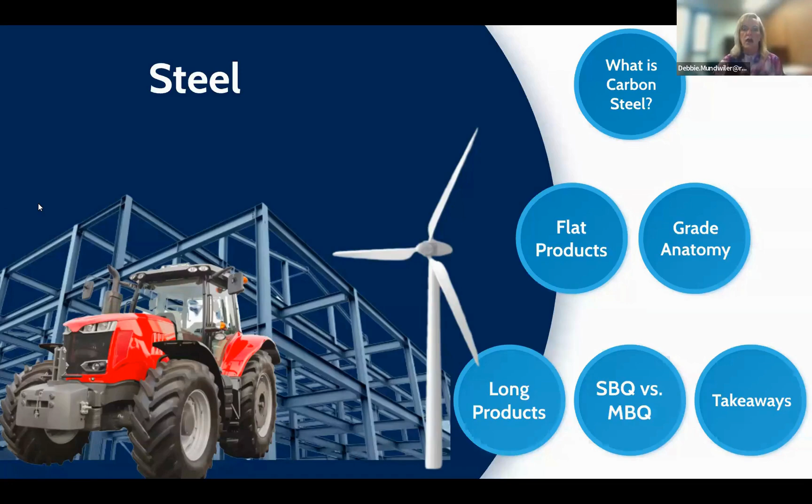Thank you, Professor Gomez. Hello, everyone. My name is Debbie Mundweiler. I am a Senior Product Manager of Carbon Long Products for Ryerson's Southern Region, and I'd like to welcome you to the Carbon portion of our Metals 101 class. Today, I will go over the topics of how steel is made and the different forms it comes in.

So let's get started. What is steel? Steel is an alloy made up of iron and other elements. Since fall is in the air and tailgating season is in full swing, I thought I could use chili as an example in relation to carbon. For chili, you'll need to start with your tomato base, and then you could add your onions, your ground beef, tomatoes, and depending on where you're from, you may or may not add beans.

Much like chili, carbon steel also has ingredients such as manganese, phosphorus, and sulfur. By adjusting those ingredients, it changes the steel properties just like when you tweak a chili recipe. It can change the flavor and texture. Is it going to be hot and spicy, or will it be mild? Will it be thin like soup broth or rich and hearty?

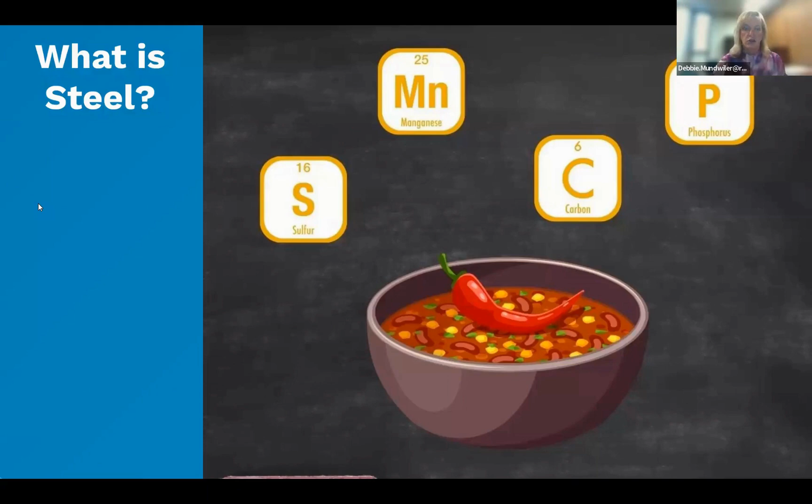Now let's discuss processed steel. The first stage of processed steel is hot rolled, often referred to as black or dry. Hot rolled black is used when the surface is not critical, but the integrity and the strength of steel is important. Another type of processed steel is pickled and oiled, also known as P&O.

During the process with P&O, the coil will go through an acid bath to remove any rust and mill scale. Once that process is complete, there is a coating of oil applied. This prevents further corrosion. P&O is much cleaner and smoother than plain hot roll steel.

Up next, you have also heard of cold rolled steel. The process of cold rolling reduces the steel to a thinner gauge. Gauge is the term we use to measure the thickness of the steel. This type of steel will have tighter tolerances, better surface finish, and uniformity.

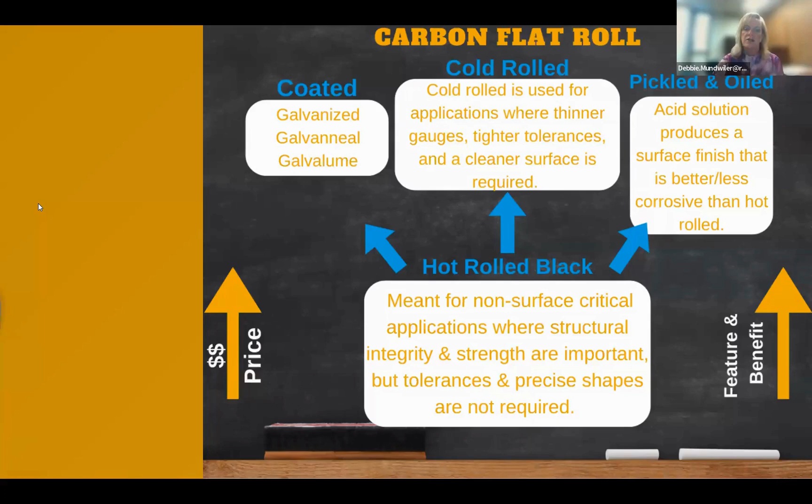Following cold rolled steel is coated steel, also known as galvanized, galvanneal, and galvalume. This process is the next revolution in surface protection and performance. The zinc coating that is applied will enhance corrosion resistance and make the steel more aesthetically pleasing. Up next is a video to show how coated steel is processed.

Hey y'all, I'm a hot roll sheet of steel. I'm going to be made into an air duct. But wait, that means I need to become more corrosion resistant. Let's face it, this mill finish simply won't cut it. So I need a bath.

What type of bath, you ask? Good question. You see, my level of corrosion resistance will depend on the type of coating I get. For instance, see the one labeled Galvalume? It contains aluminum zinc alloy. That would definitely make me more corrosion resistant, not to mention heat resistant. My cousin, who's now a roof, got one of these baths.

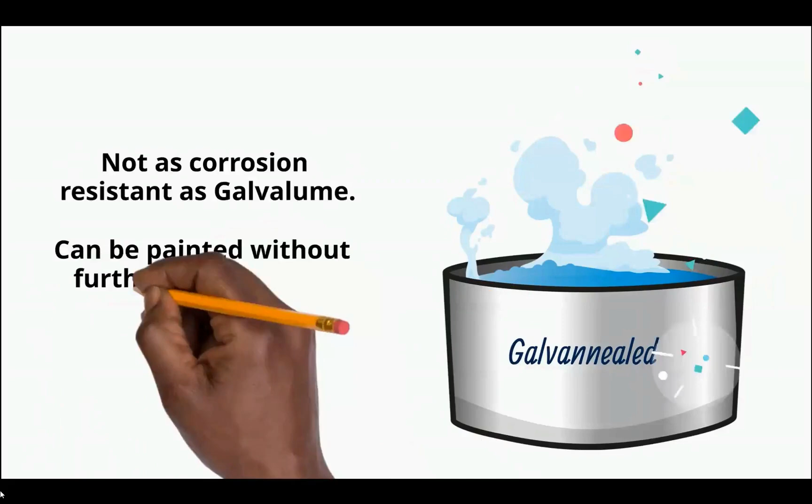Or see Galvannealed over there? That's a zinc iron alloy bath. That wouldn't make me as corrosion resistant as Galvalume. I remember my friend, who's now a door, took a Galvannealed bath. The good news is my friend can be painted without further surface preparation. But it did create a gray matte appearance. No thank you, this sheet has got to shine.

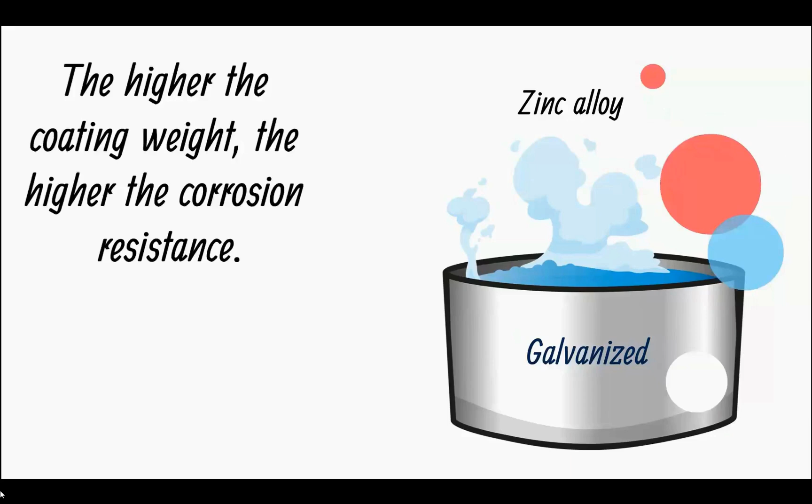Okay, well here's my bath, galvanized. It's a zinc bath. How much zinc, you ask? Well, that depends on the specified coating weight. The higher the weight, the higher corrosion resistance. Me, I'm going all in. G90. That means 0.9 ounces of zinc coating applied per square foot on both sides. And that means when I'm done, you'll be able to weld me, form me, and if you treat me right, you'll even be able to paint me. Okay, time to hop in.

The second most common is plate. Sheet and plate share similar origins, but each serves different needs. Plate is much thicker than sheet. For plate mill plate, referred to as PMP, the thickness starts at 3/16 of an inch and goes up to 6 inches, whereas coil mill plate, often referred to as CMP, begins at 3/16 of an inch and goes up to 1/2 inch and sometimes 3/4 of an inch.

CMP is made from a cast slab and rolled as a coiled product. Plate is also wider than sheet. You can get plates in 84 inch, 96 inch, 120 inch, and even sometimes greater widths.

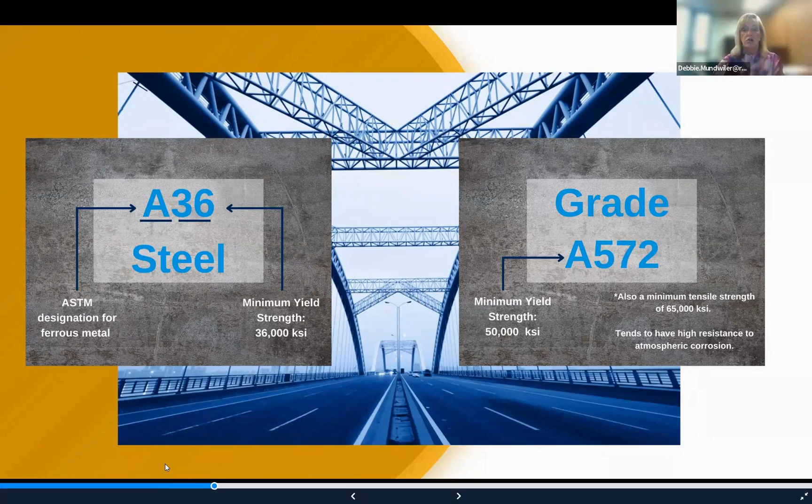Moving on, let's get into long products. When you hear about long products, you should think of bar, pipe, tube, and also angles, channels, and beams. Angles, channels, and beams are often thought of or referred to as structural products. These products are typically used in building and construction.

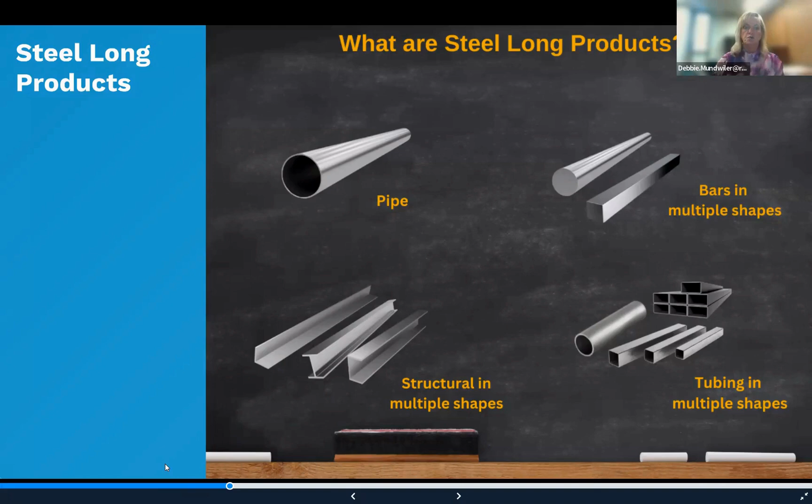Some of you may be wondering if there's any difference between pipe and tube. Yes, both are hollow, but to simplify things, tube holds things up, pipe holds things in. Examples of tubing could be grocery store ceilings and racking systems. Tubing also comes in several types and sizes, such as mechanical tubing and structural tubing. Mechanical tubing will go up to an 11-gauge thickness wall, whereas structural starts at 1/8 of an inch. Mechanical tubing is often used in recreation vehicles and solar power racks.

A common grade for mechanical tubing is grade A513, and a structural tubing grade is A500. Structural tubing is often used for signs, towers, and exercise equipment. Uses for pipe could be irrigation systems and plumbing systems. You can also get pipe in the A500 grade, often referred to as pipe-sized tubing. Another grade for pipe is A53. This grade is for pressure pipe. A53 pipe is pressure tested to see how much pressure it can withstand before bursting.

The size measurement for each is a bit different as well. Tubing is normally measured OD by ID, that's outside diameter by inside diameter, or OD by wall. The wall is the thickness of the tube. An example would be 2-inch OD by 16 gauge wall.

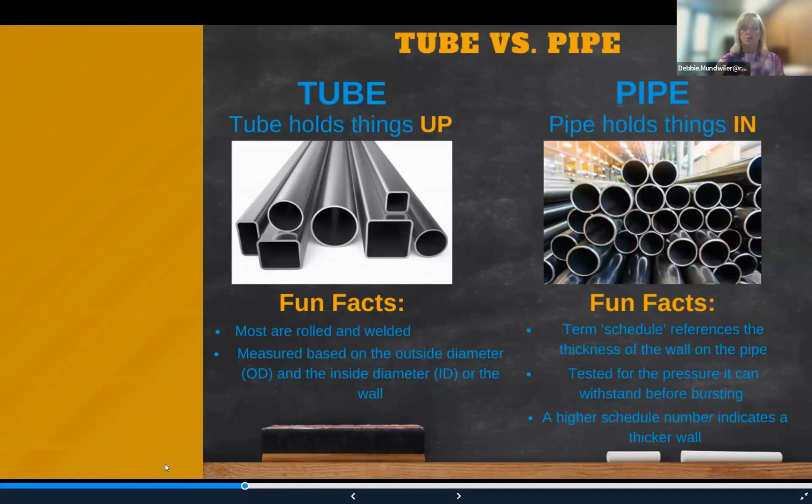Let's move on to the solid side of long products. These products consist of bars and those structural shapes I mentioned previously. There are two groups of these long products: MBQ and SBQ.

The first type is MBQ, which stands for merchant bar quality. This is going to be the equivalent of the hot roll we discussed earlier. MBQ is carbon steel only and only comes in the condition of hot rolled. There's not as much processing as with SBQ.

These hot roll bars and structural products are going to be the plain nachos of the tailgate—just a basket of chips and a little bit of cheese. Structural products are often found in buildings and bridges.

SBQ stands for special bar quality. SBQ can come in carbon and alloy. This type of bar steps things up a bit.

I would consider these the loaded nachos at the tailgate. These bars are going to have more ingredients and will be much more complex.

SBQ can also be thermally processed, often known as annealed or quench and tempered. These bars are going to have much tighter tolerances, special chemistries, and enhanced mechanical properties.

You will find these types of bars in highly specific applications, and they can also be referred to as engineered bar. SBQ requires precision and reliability that standard hot roll MBQ cannot meet. Some examples of uses would be shafts, sprockets, and gears.

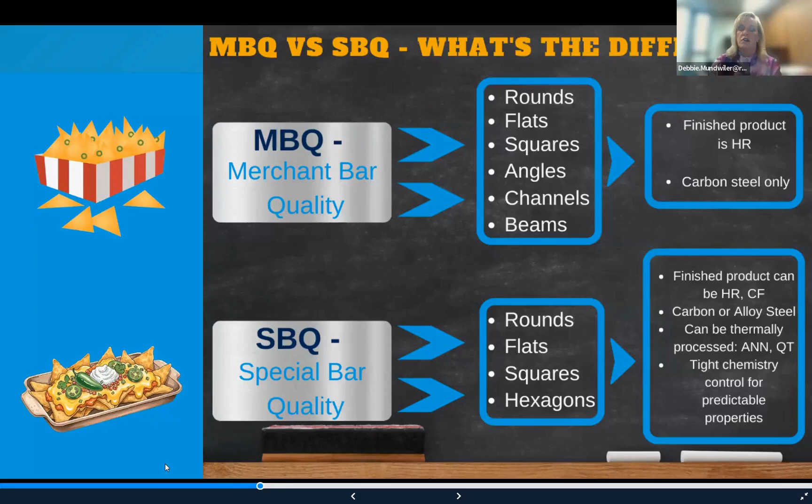So remember, when speaking of carbon steel, it comes in several forms: sheet, plate, and long products, along with several different grades of steel and conditions depending on the intended end use. Also keep in mind, tube will hold things up, and pipe will hold things in. I want to thank you for following along, and this concludes our lesson on carbon steel.

Awesome, huge thank you to Deb for kicking us off with that lesson in steel. Did anyone else get really hungry during that presentation? No, just me? All right, well, we had some questions come in while Deb was talking, so let's get into some of those. Deb, let's see.

Does the way a bar is made—hot rolled, cold finished, or turned and polished—affect its performance? Yes, all three will have differences in surface finish strength, dimensional accuracy, and the internal stress within the bar.

What materials are most common for pipe, and how does the application, like fluid transport or structural use, affect the choice? In terms of carbon pipe, if there's going to be a transport of fluids such as hot water or gas, you'd want to use a pipe that is rated by how much pressure it can handle. For structural type situations like scaffolding framework, you would not need a pressure rated pipe.

All right, that makes sense. Awesome. Well, I'm sure we're going to bring you back at the end for some more questions, but I'll let you take a breather for now.

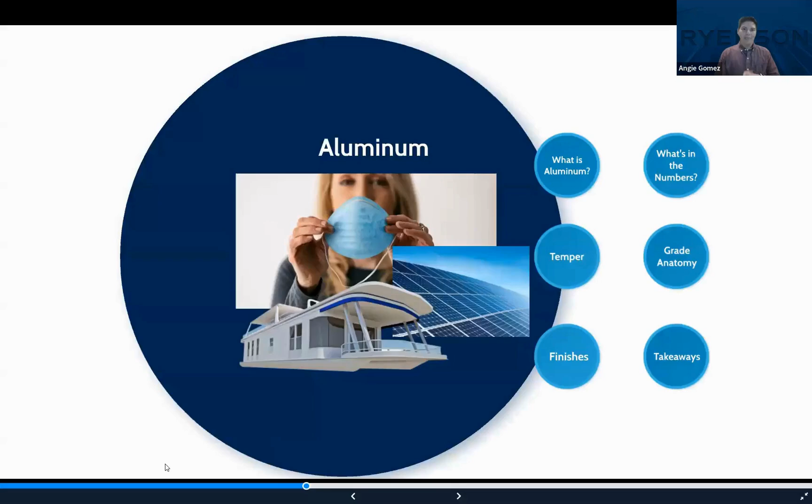So now that we built a solid foundation, it's time to lighten things up, literally. Welcome to the aluminum campus, where formability meets versatility, and we all get to meet Professor Jackson. Good afternoon, everyone. Thank you for joining us today to learn a little bit more about the metals that Ryerson offers. I'm happy to tell you about aluminum, but first a little about me.

My name's Allie Jackson. I'm your product manager for Aluminum for the South, which means I hold the relationship with the mills. I talk to your vendors, make sure you have the best price, and then we make sure your inventory is in the right place at the right time. But enough about me, let's talk about aluminum.

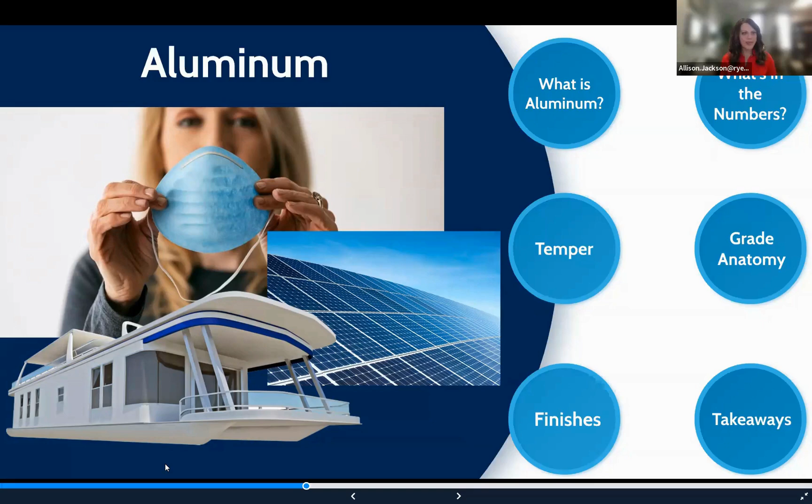You're going to learn a handful of pieces today: what aluminum is, what all these numbers and tempers mean, how we're going to put those pieces together to make grades. We'll talk about the 9 finishes that aluminum can come in, and then we'll put all those pieces back together for you with some takeaways.

When you think about aluminum, if you're not super familiar with metal, your brain may go to aluminum cans, aluminum pots and pans, but aluminum is in a lot of different places you may not expect. For example, 7% of the moon's soil is aluminum. You'll find it in all kinds of places, utilized in a lot of different applications.

Why is that? Because aluminum is made of one of the most abundant elements on Earth, bauxite. Depending on what you add to that—copper, magnesium, manganese, silicon, zinc—it's going to change your grade and ultimately the way your material acts in its end use. There's a handful of characteristics on why people like aluminum, and we'll come back to those in just a moment.

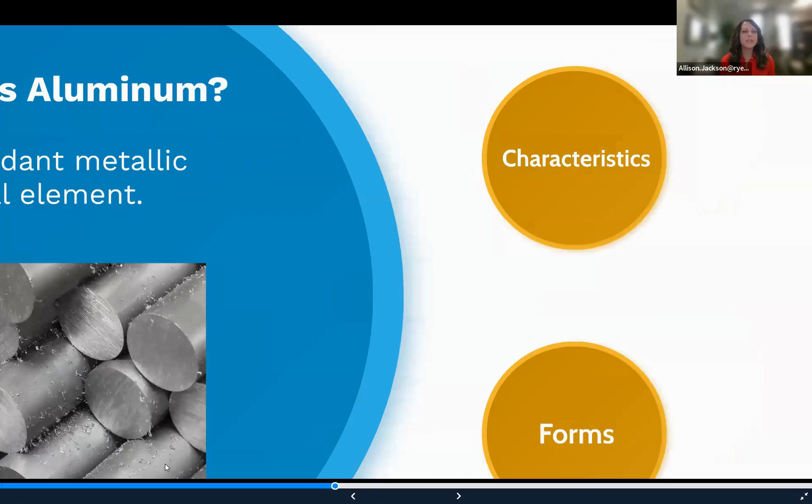There's 6 forms all together, just like Debbie. We have flat and long. But first, let's dig into the characteristics and the reasons why people like aluminum.

As mentioned, we have aluminum cans. It's probably where your brain goes if you're not super familiar with aluminum, which is good. Aluminum is very recyclable, so please recycle those cans. 70% of all aluminum that was created is still in the aluminum life cycle today. Cans in particular have a really short lifespan—from your grocery shelf to recycling center and back onto the shelf, it's about 60 days from mill production and all of those processes. So very sustainable. We like that.

Let's save the earth, please. The other piece we like aluminum for is corrosion resistance. Back on the cans, that Coca-Cola that sits in the middle of your can isn't corroding your material. Beyond that, we see aluminum utilized in other corrosion-resistant needs like marine uses—boat hulls, dock parts, things of that nature. It's also a really strong but lightweight material.

Here we have a fancy sports car, and you'll find aluminum in all kinds of different parts of cars. It's strong, so it's going to withstand a lot of force, but it's lightweight, so your car can still go fast, fast, fast.

We also like it for its formability and machinability. This car here has a few indents on the side of the vehicle, and sometimes you'll find interesting indents in a hood—that's all formed. Your aluminum is formable, it's easy to work with. Along with that, machinability—it's not going to gum up your CNC machines, it's going to chip or kind of curly Q off. And again, thinking of sustainability, you can collect that scrap, recycle it. It goes back into the aluminum life cycle, and we continue on.

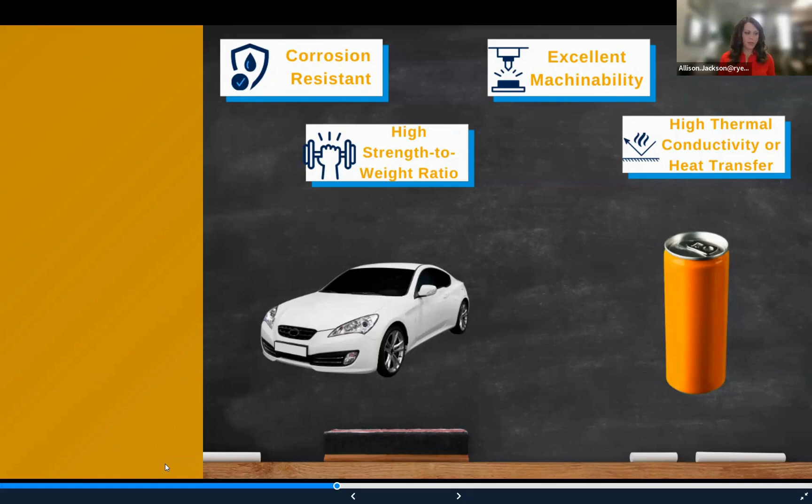So we've looked at the reasons why people like aluminum. Let's look at a few of the forms we can get aluminum in. As mentioned earlier, we have 2 flat and 4 long. Looking at our flat products, we have plate and sheet. Just like Debbie mentioned, the gauge or thickness of your material is going to really determine whether you have plate or sheet—1/4 inch is kind of the cutoff for aluminum, which can go one way or the other.

For your flat products, you're going to see that used in a myriad of places—marine, auto, house siding, roofs, aerospace, military uses, pots and pans, cans. We've talked about it all, and we'll talk about more.

The long products, we have more categories here: structural and pipe, bars which are solid pieces of aluminum, extruded shapes, and tubing. Just like Debbie mentioned, pipes hold things in and tube holds things up. Your extruded shapes here for aluminum are very unique items. If you're out there trying to sell some aluminum, you want to look out for some customs. Custom extruded shapes—you have to have a specific die for that material, and once you get a stronghold on that business, it's tough to move it around.

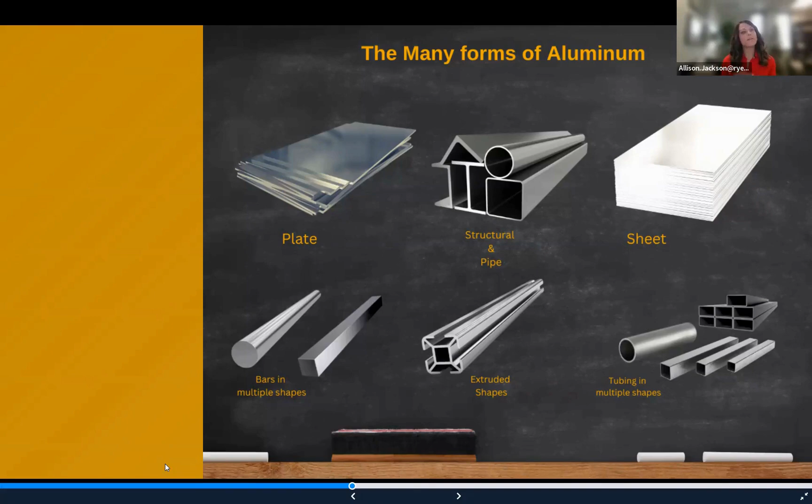We see aluminum long used in a myriad of places as well—signs, cars, HVAC, architectural, electrical uses, medical uses. Again, the utilization of aluminum runs deep, y'all. You can find it in just about anything. So we talked about why people like it and what kind of forms you can get aluminum in. Let's talk about the alloys next.

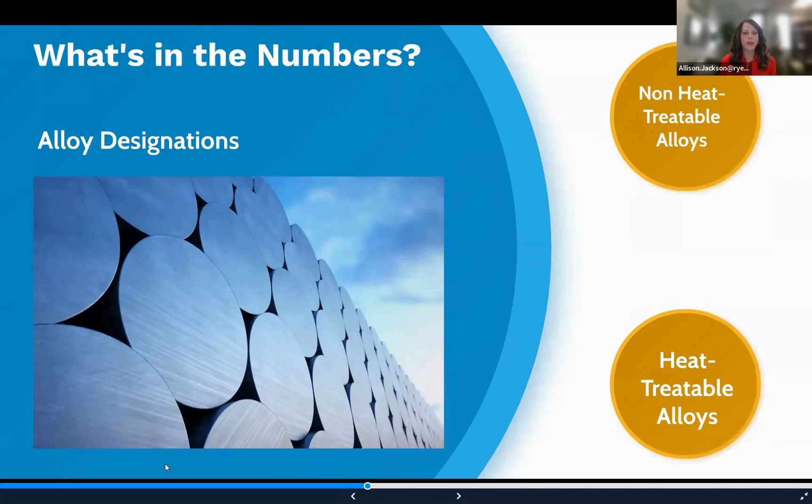So there's a couple different categories for aluminum, and the two different alloys are non-heat treat and heat treat. The difference here is the way that that material is brought to strength. For your non-heat treat alloys, you'll have a cold worked material, so rolling or bending to bring that material up to strength.

And here they are. We've got our 1,000 series, 3,000 series, and 5,000 series. As these numbers increase, so does the strength of your material. Your 1,000 series most often you'll probably find 1100 as your request. That's your most pure aluminum out there. It is very corrosion resistant and it conducts electricity and thermal heat very well.

We see the 1,000 series used in electrical uses a good bit, radiators, heat exchangers. We'll also see it in power transmissions. And again, it's good at that corrosion resistance, so you'll find it a lot in pressure vessels or chemical vessels.

Continuing down the list, we've got our 3,000 series. You'll most often find inquiries for 3003 or 3105. This is a very workable product, a little bit stronger than your 1,000 series. So you'll see it in boats, aircrafts, cargos, trailers, a lot of things that need to be formed and worked. But your 5,000 series is by far the most popular of your non-heat treat alloys here.

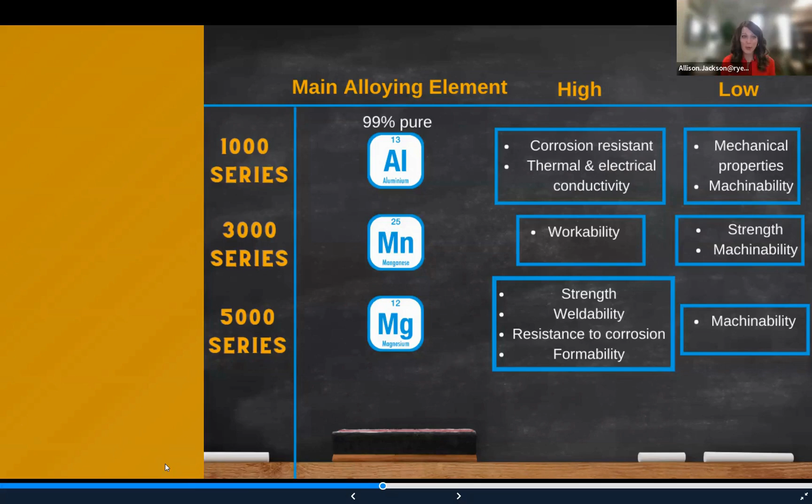5052 is for sure going to come across your desk. You'll probably see some 5005, maybe some 5182, some 5086. We'll dig deeper into what some of those numbers mean later. But your 5,000 series is your most popular because of all its great qualities. We see that used in automobiles, fuel tanks, signs, construction. Again, guys, just about anything you can think of, you can probably find some aluminum in. So those are our non-heat treat alloys.

Let's look at our heat treat alloys. As we mentioned, the difference between non-heat treat and heat treat alloys is the way that the material is brought to strength. Your non-heat treat are brought to strength through cold working. Your heat treat are heated to get to their final strength.

Same idea with the non-heat treat alloys here: as these numbers increase, so does the strength of your material. 2,000, 6,000, 7,000 series - that 7,000 is going to be by far the strongest of all the grades we've talked about so far. Your 2,000 series is probably going to be something in the 2024 family if you have any inquiries for that. It's generally a very application critical type of project.

We see it used a lot for aerospace and aviation, and I don't know about y'all, but if I am flying somewhere, I want my plane to stay up where it's supposed to be, so we want to make sure that material is correct. We also see 2000 series utilized in some precision hardware, fittings, things like that.

Your most popular series here is going to be your 6000, and you'll see 6061 and 6063 called out a good bit for those. You can find 6000 series in almost everything we've already talked about, but most often I see it in transportation and construction.

Now your 7000 series is pretty unique, guys. That's your strongest of all your heat treat alloys here. That zinc in there really brings that strength. We see that utilized in hydraulic presses, also in a lot of motorsport - ATVs, dirt bikes, things like that have to go up and then withstand a lot of force as they come back down. If you're digging around for some customers who use 7000, they're probably looking for 7075 or 7050.

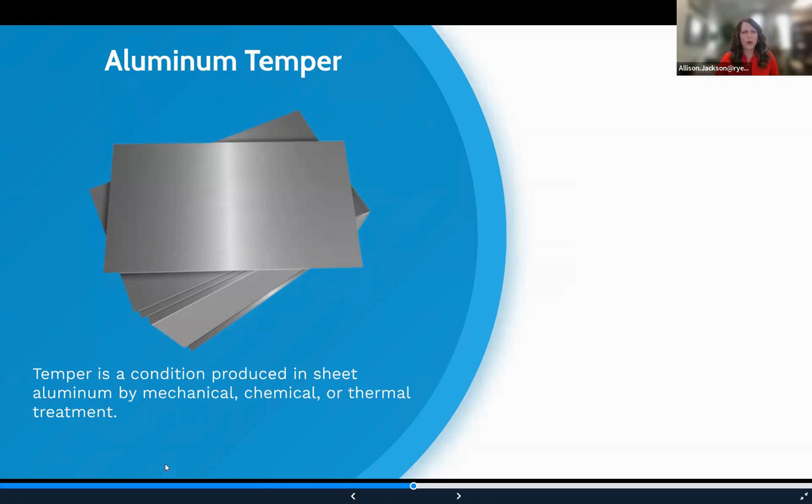So if you get an inquiry for aluminum, or you're trying to sell some aluminum, and all you have is the grade, you're missing a big piece of the puzzle. We need the temper. So just like carbon, there's letters and numbers that come along with aluminum. Your aluminum temper is going to basically be how your material performs in its end use. And we're going to watch a little video to give you some more info.

Welcome to the Aluminum Bistro, where choosing the right temper can make or break your order. I'm ordering aluminum sheets, but I don't know what temper to choose, what do you recommend? Let me walk you through our temper options. Each adds a special flavor to your aluminum, depending on how you plan to use it. For starters, we have the F temper, or as fabricated. This is your basic aluminum in its as-rolled form. No frills, no extras. Perfect if you're planning to do some extra processing on your own. Might need more refinement. Let's keep going. Next, we have O for annealed.

This temper makes your aluminum more flexible and ductile, ideal for when you need extra toughness. However, it's a little softer, so you might lose some strength. Soft and flexible, but I'm looking for something stronger.

You might like our H temper, strain hardened. This adds more hardness and strength, perfect for when you need durability. Stronger? That's more like it.

Or perhaps the T temper, thermally treated. We use heat and cooling to strengthen your aluminum to perfection, making it perfect for high-performance applications. Sounds fancy, but maybe a bit too advanced for this order.

And finally, we have W for solution heat treated. Rarely the final dish, but it's a special process used to prepare your aluminum for further treatments. I don't think I need that for now.

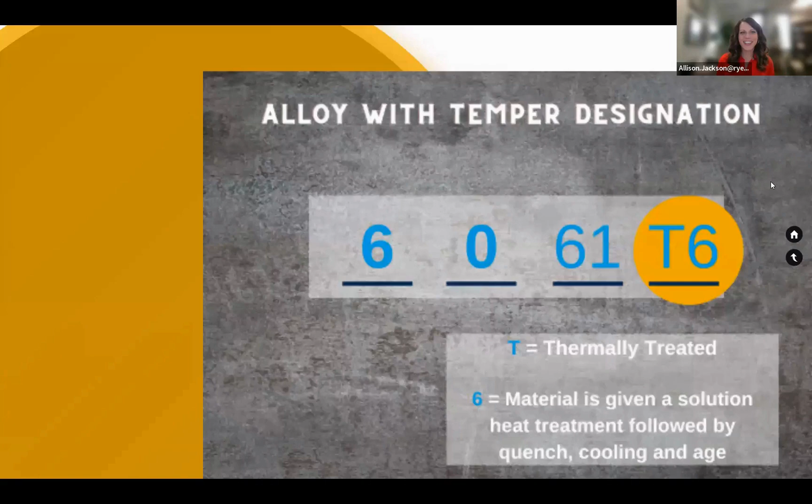So let's put it all together with some 6061 T6. As a reminder, your 6061 is your most popular heat treat alloy, and we have both pieces of the puzzle here. Your 6061 tells the mill what alloying ingredients to put in, and your T6 tells it how to finish your material, so that those two pieces working together ultimately produce a product that is going to act or perform correctly at the end of the day in its end use.

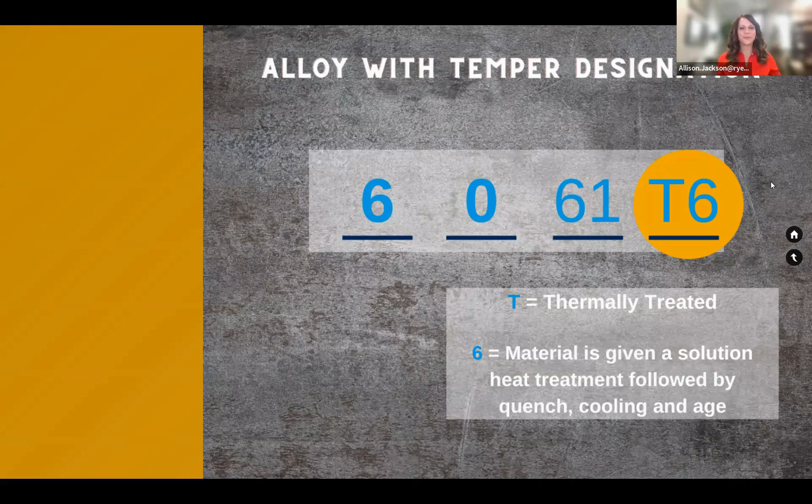Okay, so we talked about how aluminum acts, why people like it. Let's talk a little bit about how it looks. Aluminum can come in 9 different finishes.

We'll start with the mill finish because that's by far the easiest, and it's exactly what it sounds like. It's just however the mill finishes it. There's nothing fancy, no extra TLC that goes into it. That's going to be your most cost-effective of all of your aluminums.

Painted products are exactly what they sound like. You can get the top or bottom of your material painted. We have a couple of mills that paint in-house, and we also leverage some outside processors, OSPs. Both sides of that puzzle love to boast that they can match any paint color out there. They're going to ask you 9 million questions to get there, but they can absolutely do it.

Then we move on to our anodizing. Anodizing changes the chemical finish or chemical makeup of your material. Essentially, it's just a protective layer on the aluminum. I like to use the example of pet tags, dog tags. That is an anodized product. It's got that coating on it, sometimes blue or green.

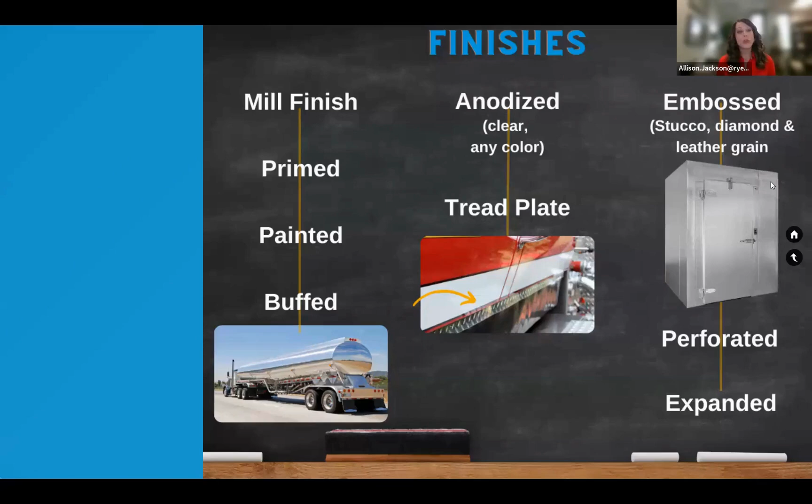So we've talked about all the chemical makeup, the forms, the finishes. Let's put all of those pieces together on our takeaways here.

Once again, aluminum is made out of bauxite, your most abundant element on Earth. You have 2 flat and 4 long products - plate, sheet, pipe, bars, tubes, and customs. There are 3 non-heat treat alloys - your 1, 3, and 5 series. And your 3 heat treat alloys - your 2, 6, and 7 series.

You have 5 aluminum temper options. Again, that's just the mechanical properties of your material and how they're going to act in the end use. And the 9 finishes that you can get aluminum in.

So we've learned a lot today. I'm going to pass it back over to...

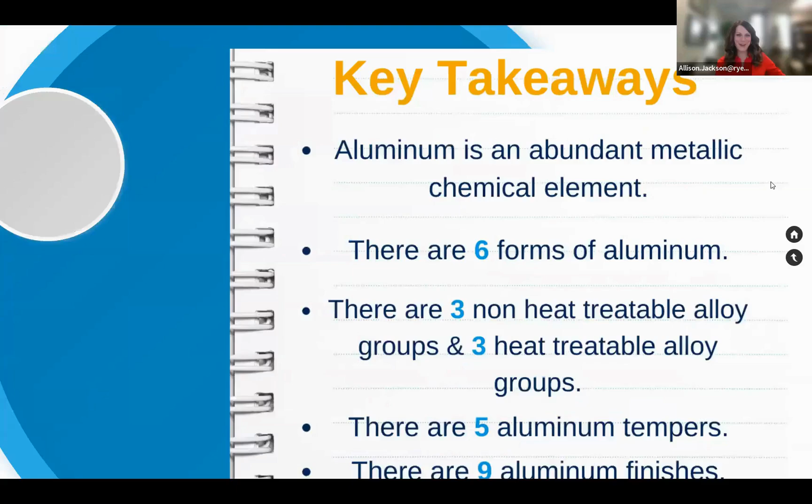Professor Gomez: That was awesome, Allie. That was truly a masterclass in aluminum. And I think you also get the award for rolling with the punches with some of those tech hiccups. So good job - we still got super valuable information there.

But while we were talking, we had some good questions come in. So let's see - the first one is, if somebody's asking for stronger aluminum, would you typically guide them towards a different grade, a different temper, or both?

Both is going to be the answer. At the end of the day, the material that you need is going to be based on the end use of your application. It's almost a tough one to answer without knowing the other pieces of the puzzle, but that's why we ask so many questions on supply chain - to make sure we're offering the right material. So as we discussed earlier, you've got your non-heat treat and heat treat products, and then different tempers. The end use is really going to drive what kind of different material we may need to order.

Got it, so the question to us would be a question back to you. That's it - what's the end use? If you give me that, I may be able to advise further. Awesome, no, that's awesome, alright.

So kind of a tie-in with that, but maybe a little more fine-tuned version: what grades are best for corrosion resistance versus grades that are better for strength?

Again, I hate to revert back to the end use, but honestly, that is almost always the answer. Typically, you're going to want to find one of your aluminum grades that has a little more manganese and iron in it. If you're really focused on corrosion resistance over strength, 5052 or 5086 is probably your better bet. 6061 is corrosion resistant and a little bit stronger, but again, depending on the temper and the ultimate chemistry of the material, the end use is really going to drive what you need to be looking at to order.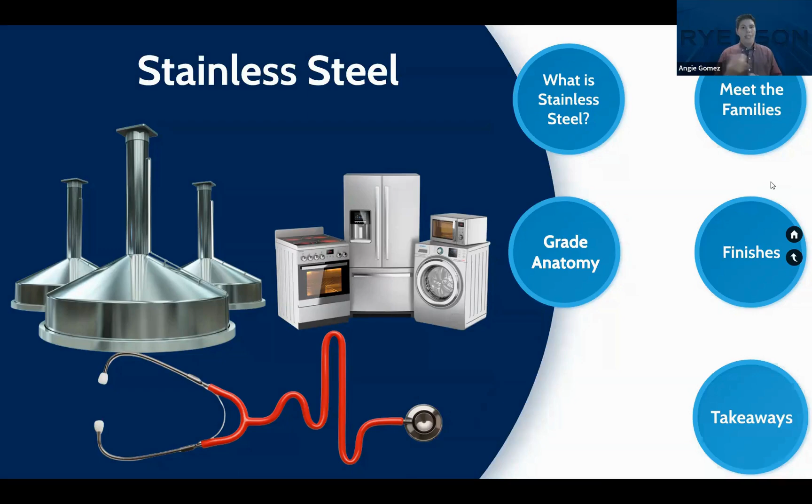Today we're actually going to dive in and explore what makes stainless steel different than the other materials. We're going to talk about its unique characteristics and the different grades, the various forms it takes, and the diverse finishes that give it its signature look. So we'll start right here.

With 5 families of stainless steels available, each is differentiated by the alloying elements that are added. There are over 150 different stainless steel grades, each with their own chemical makeup, and we actually see new alloys being developed even today. Stainless steel is a versatile iron-based alloy known for its resistance to rust, corrosion, and staining.

Due to its chromium content, it's continuously protected by a passive layer of chromium oxide that forms naturally on the surface when the metal comes in contact with air or water. This layer of chromium oxide allows the stainless to regenerate itself when scratched, thus it's corrosion resistant, highly durable, and less prone to rusting, even in moist and harsh environments.

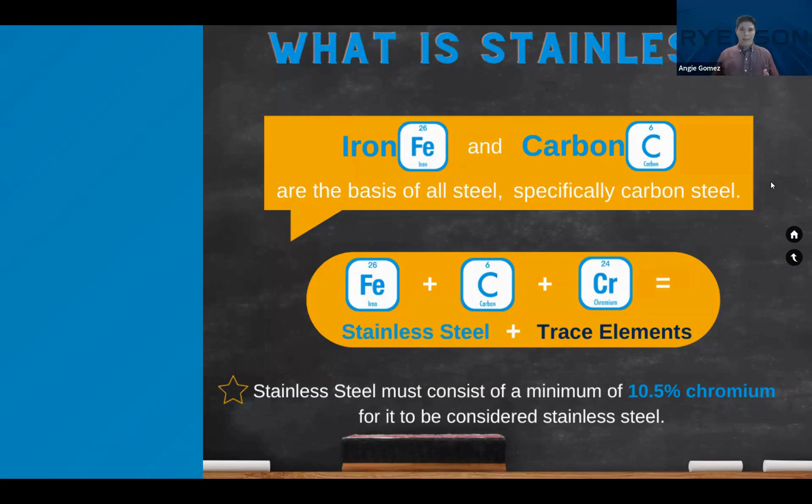Stainless steel comes in many forms and shapes, just like the other materials we discussed today, so we're going to take a look at that.

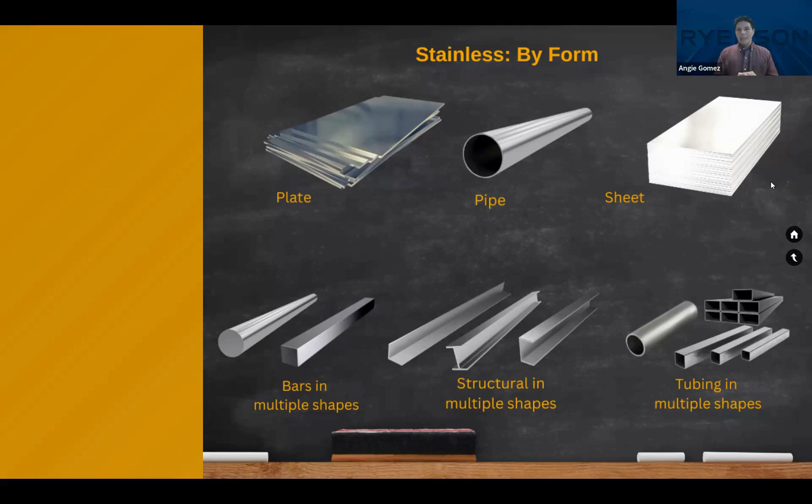So now that you have some of the basics, we're actually going to jump a little deeper into the stainless grade families.

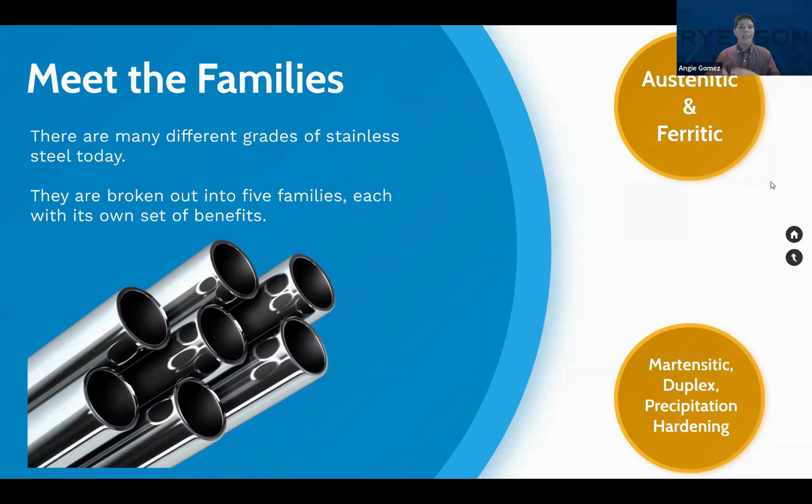Stainless steel is grouped into 5 main families. Each family has unique properties and applications, from kitchen utensils to medical equipment to industrial machinery and architectural structures. The classification of stainless steel into families is actually determined by the alloying elements that are added to that basic iron and carbon composition, and that's going to then in turn create the grain structure and give it its properties. So 2 of those grain structures are austenitic and ferritic.

If you see an L, for example 304L, on a test report or stenciled on material you receive, that means it has a low carbon content, composing less than 0.03 of its overall composition. You will see austenitic metals used in your food containers, tanks, silos, and most general purpose and cosmetic applications.

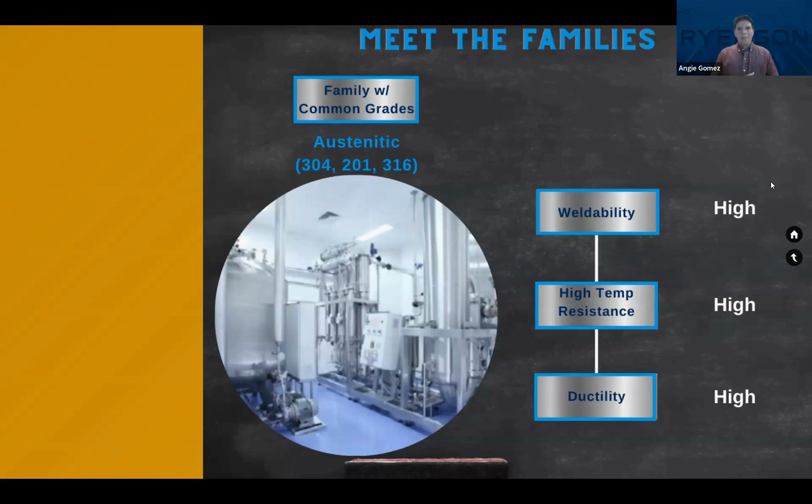So ferritic stainlesses contain more chromium than austenitic, no nickel, and adds in ferrite. The absence of nickel allows ferritic stainless to be more stable in pricing over time, and ferritics are magnetic, while austenitics are not because they contain austenite. Ferritics are typically used in appliances, car exhaust systems, and dishware.

You probably find 430 as the metal that's inside your dishwasher, and 409 is probably part of your car muffler.

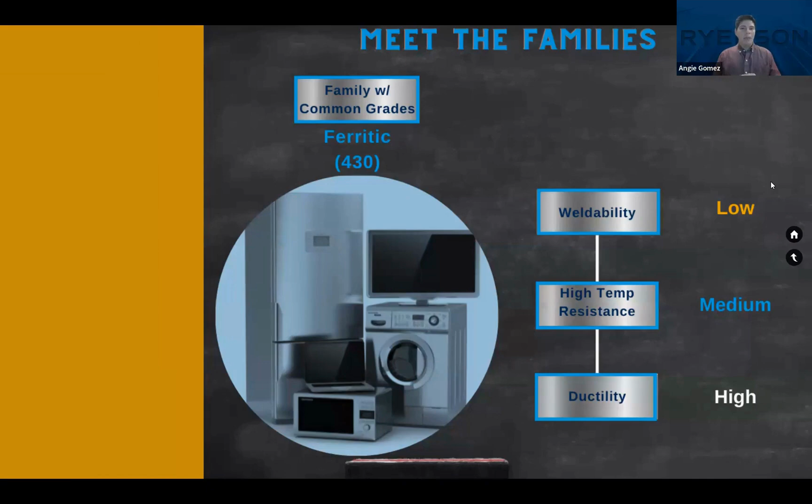Martensitics are going to be used in cutlery and tools, and they contain higher carbon than austenitics and no nickel. Duplexes are common in the oil and gas sector due to offering properties from both austenitic and ferritic grades, like being weldable and highly formable.

You may have heard of 2205 duplex, probably one of the most common ones. Duplex actually gets its name because of its dual grain structure.

It's composed of both the austenitic and the ferritic structures, and I've heard it described as almost like threads, because we have some going up and down and some going across, so it almost looks like a stitching pattern if you look at it under a microscope.

Oil and drilling and chemical processing operations use duplex, as it's stronger than 316 and better at corrosion resistance.

Precipitation hardened, also known as PH, is actually a hardening process and less about the chemistry of the material. It's a heat treating technique used to increase the tensile strength of the material. These materials are typically found in aerospace and high-tech applications like gears, valves, and other engine components. So kind of like Allie with her aerospace, when we're requesting those, we really want to make sure we know what it's being used on, so we make sure to get you the right stuff for its end application.

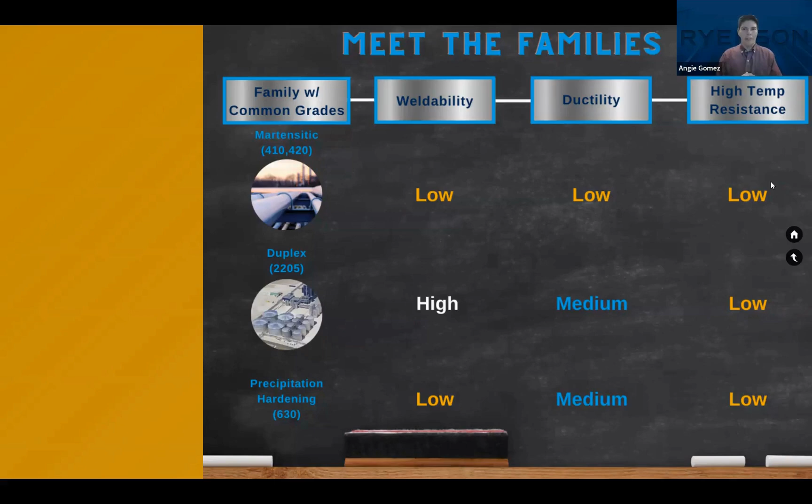So now we can transition to talk about the finishes stainless can have.

Are you looking to enhance the appearance and functionality of your metal products? Are you not sure which is the right match for you? Then let's play Meet the Metal Finishes!

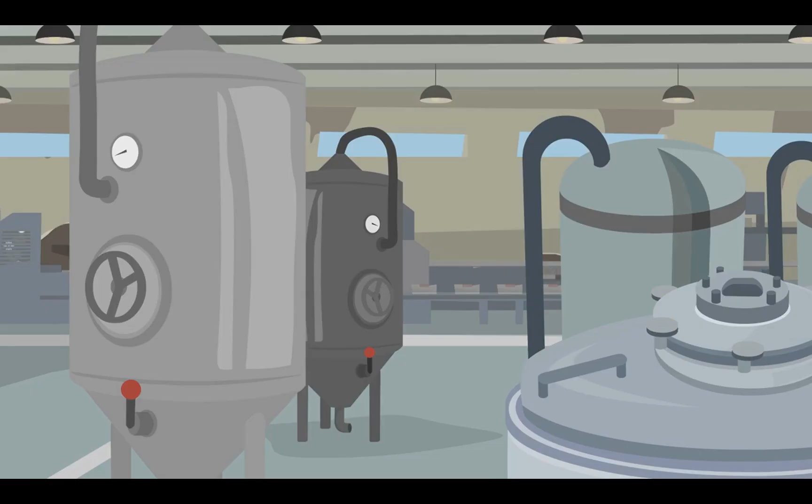Today we're featuring stainless steel finishes. While a bit dull and non-reflective, this first finish likes industrial applications like tanks and conveyors. Meet number 1, hot rolled.

This next finish is a smooth character. Non-reflective, this descaled finish is ideal for roofing applications. Meet 2D. If you need a more general finish, meet 2B.

Also smooth, 2B is moderately reflective, ideal for cookware.

Bright annealed is a mirror-like reflective finish, used in auto and appliance trim, surgical instruments, and more. Number 3 and 4 is often considered a final polished surface, providing moderate smoothness and reflectivity.

It's time for the number 8 twins. Number 8 directional gives you visible fine lines for a traditional look. Number 8 non-directional is reflective with no visible lines, available in sheet form.

Now, here are 2 special finishes. PFD stands for pit-free dairy. This ensures a pit-free surface for food, beverage, and pharmaceutical industries. Not to be overlooked is Super 4, a more advanced finish with a single-digit RA value.

Not sure which finish to choose? Let Ryerson help find the best fit for your application.

So now that we know the flat finishes, we're going to pivot over to some bar finishes, and we're going to start again with the hot roll.

Hot roll comes out of the mill, similar to how carbon bar is produced. It does not get any extra processing done at the mill. It's typically pretty dark and oily, and it's going to have some scale on it, almost textured, if you will.

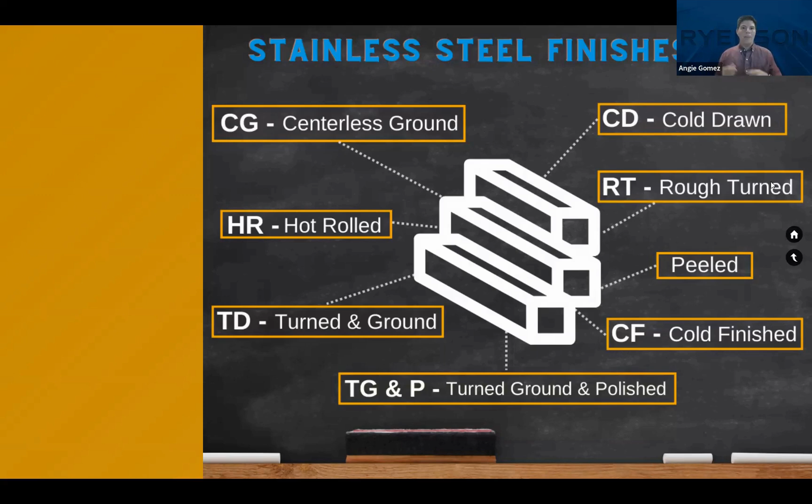And it's going to be pretty shiny after it's done, but not quite as shiny as TGP, which is turned, ground, and polished. So it starts the same as your turned material, but it does get some final processes that use abrasives to polish and buff to get a very shiny polished finish.

Now we're going to just do a quick recap on everything we've covered today. Remember, stainless steel must consist of at least 10.5% chromium to be considered stainless. There are 5 families of stainless steels that each have their own chemistries and characteristics. Ryerson does offer a pit-free dairy finish, which can be used for food and dairy applications. And there are 6 flat finishes and 8 bar finishes that are used in stainless steel products.

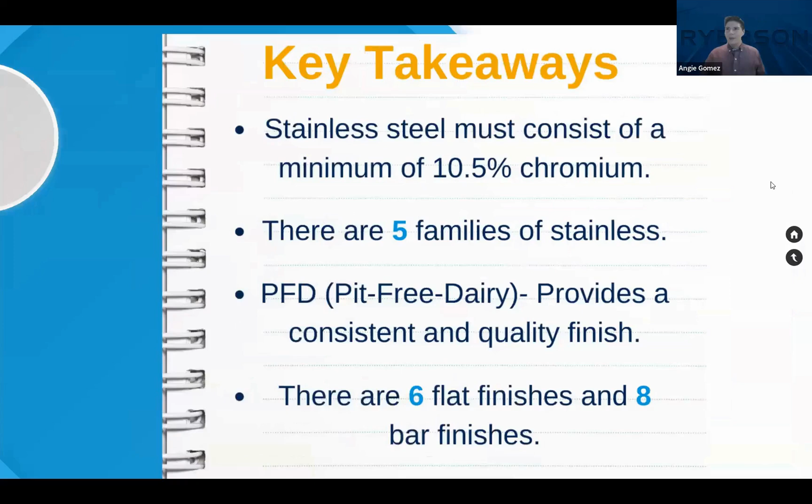And now it's my turn to answer some of your questions. So I've got to look them over real quick, but let's see here. How does a mill achieve a higher finish in terms of RA so that it may be buffed to a mirror finish?

RA stands for roughness average. This is the average between the peaks and valleys on the surface of the material, kind of like we were just talking about with the scale, if you will. So the lower the RA, the smoother the surface. A number 4 is done typically using about 150 grit abrasive belt. That's used to sand down the steel to a smooth but not overly shiny surface. It's kind of like a satin finish, and there will be some visible grain going in that direction.

For a number 8, which is what we consider a mirror finish, that polish is achieved by rubbing the material with gradually finer abrasives. So it's going to start at the number 4 process, and then to finish the mirror it's going to actually get some work done before - it's going to get some pre-grinding to remove any imperfections off the surface. It gets that first hit of the abrasive, and then gradually finer abrasives are used all the way down to a final buffing that makes it bright, smooth, and mirror-like.

Let's see here. Is 316 or 304 more corrosion resistant?

So your 316 is going to be more corrosion resistant than your 304, especially when we're talking about harsh environments. If you're working with chlorines, acids, things like that, because 316 contains more moly. And so while the chromium forms the primary oxide layer, by adding some extra moly in there, it's actually going to stabilize that protective layer that forms on the top of the stainless when it comes into contact with those things. And so that's going to make it more resistant to that localized corrosion, especially when you're talking about harsh environments with chemicals and that kind of thing.